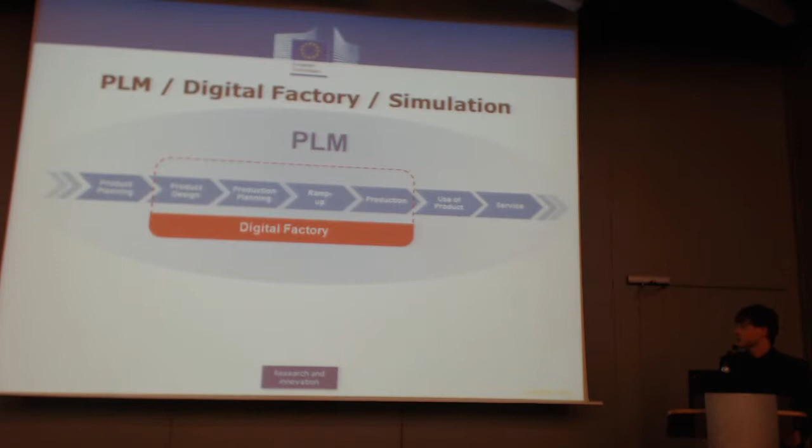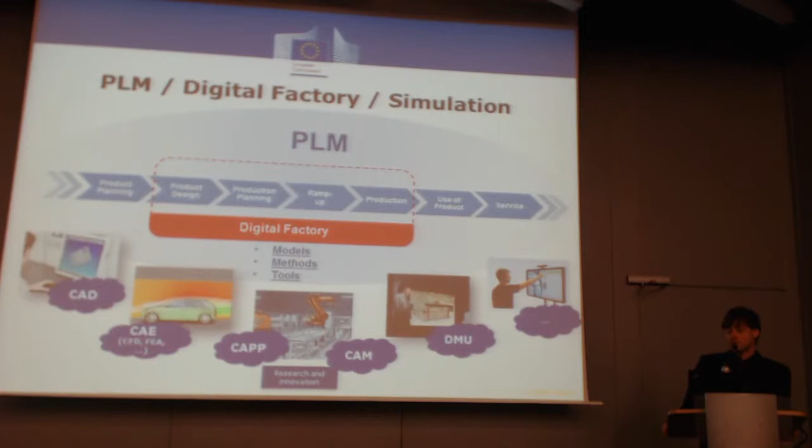If we narrow it down to the factory, then there's the concept of the digital factory, which I'd like to mention specifically because it's a very nice concept that consists of methods, tools, and models which help to plan, implement, and also optimize and run factories. This brings us down to the lowest level, where we see different tools: CAD tools, CAE tools, computer-aided process planning, and other tools.

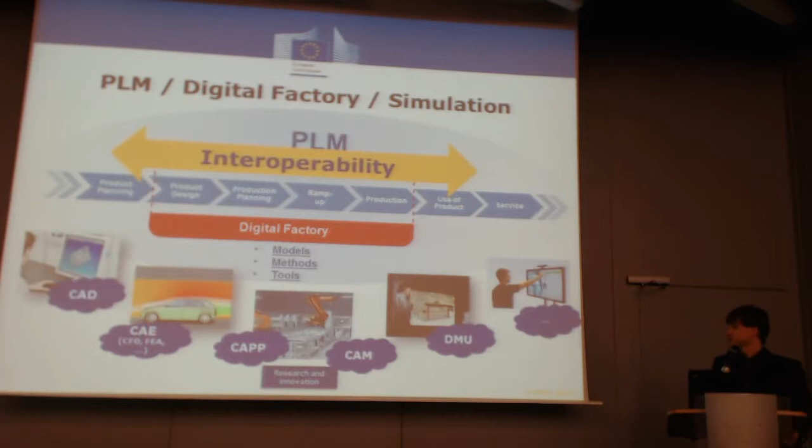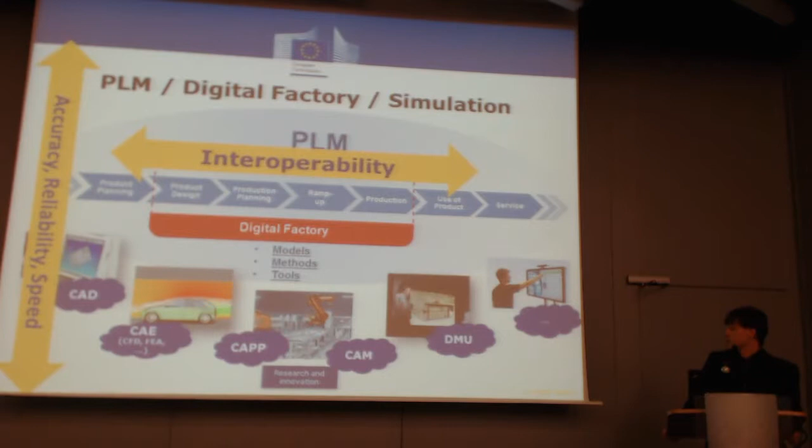Now we have the big picture of what our group is about. On the horizontal, it's about creating interoperability across the PLM, but also about improving simulation tools in terms of accuracy, reliability, speed, and maybe developing new tools and applications. The European Commission has recognized this need, and as Dr. Riemschneider said before, in the former FP7 roadmap there were 3 topics: one was the digital factory, the other two are smart factories and virtual factories. We will talk about this later, but we represent the group of digital factories, which comprises 8 projects.

The goals formalized by the Commission were European leadership - that sounds great - in knowledge-driven platforms, tools, and methodologies for product development and manufacturing. Second, accelerate product design and manufacturing planning, and improve accuracy, reliability, and speed of simulation. That's pretty much what we showed in the beginning.

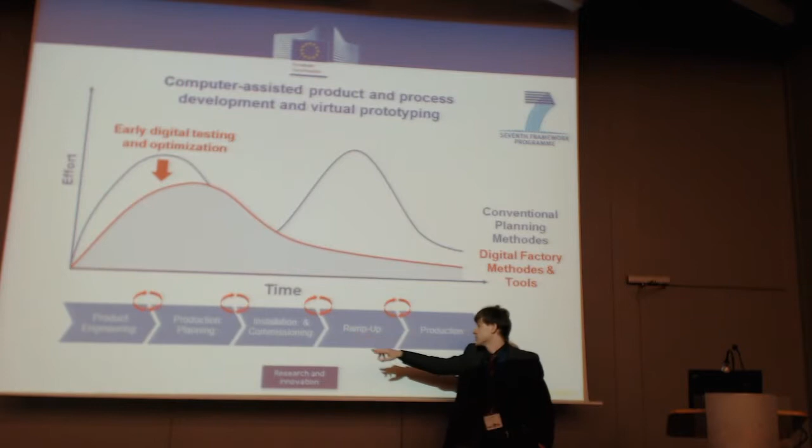This can also be illustrated by the effort it takes to bring a product into manufacturing. Basically we have two worlds: product engineering and manufacturing. These two worlds sometimes do not work so well together because manufacturing is more traditional - they like to implement processes, and once implemented, they don't want to change them. Product developers are much more innovative; they're used to inventing something new. The question is how to bring both worlds together.

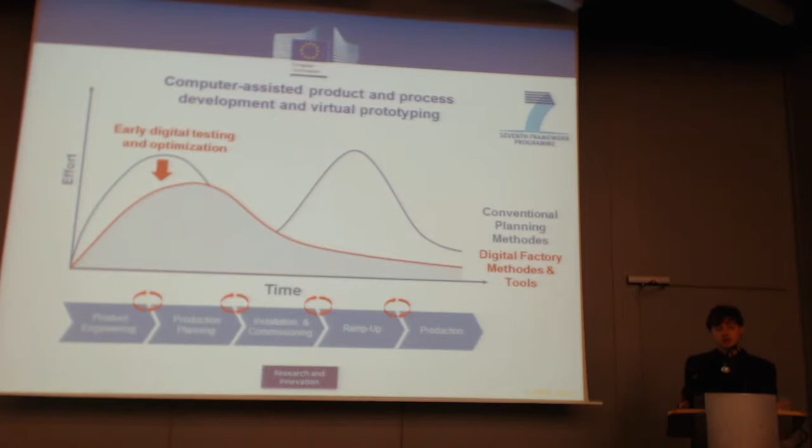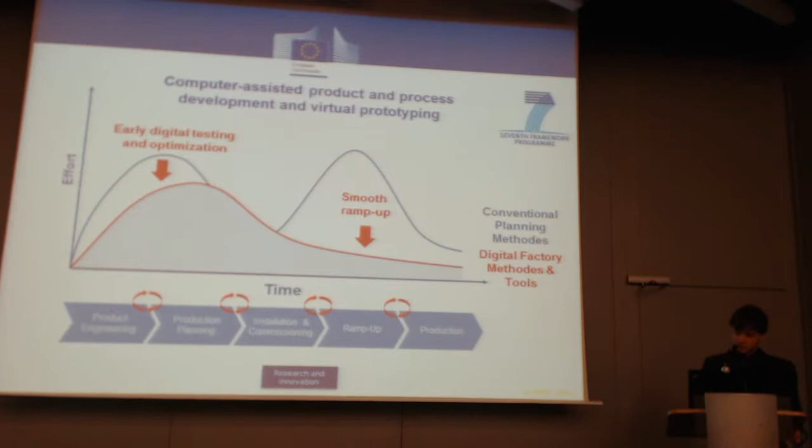This is a simultaneous engineering challenge, and one way to address it is by early testing and optimization already in the phases of product development, which allows for a smoother ramp-up during manufacturing. So our topic is about bringing two worlds together: manufacturing and product engineering.

That was the goal in the FP7 program, but we're moving forward to Horizon 2020, which I think is the biggest research program ever. The question is, what will change in between? The different megatrends and challenges - globalization, changing customer demands, rapid technological developments - are still ongoing. They didn't change, so should we change our goals? That is one of the questions.

We started to collect some key points. They basically come from the Commission, and they could be the goals for the future Horizon 2020 roadmap. It said: responding to higher variance, shorter innovation cycles of highly complex products like cars and airplanes. I tried to translate that - for me that's basically about mastering complexity and increasing transparency.

Then boosting the launch of innovative products through digital design and validation. We have to stimulate new innovations in terms of products, but also in terms of the tools used to design these products. We want to shorten the time to production, improve productivity, and reduce effort, time, and costs in production.

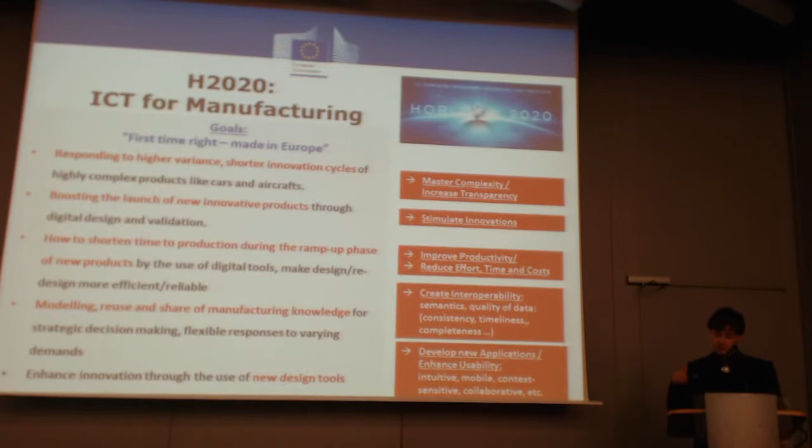And the final bullet point is about enhancing innovations through new design tools. We need to develop new applications, and existing applications need better usability, so we have to create intuitive tools. We have to bring the different applications onto the shop floor - we need mobile applications, context-sensitive applications, and collaborative applications.

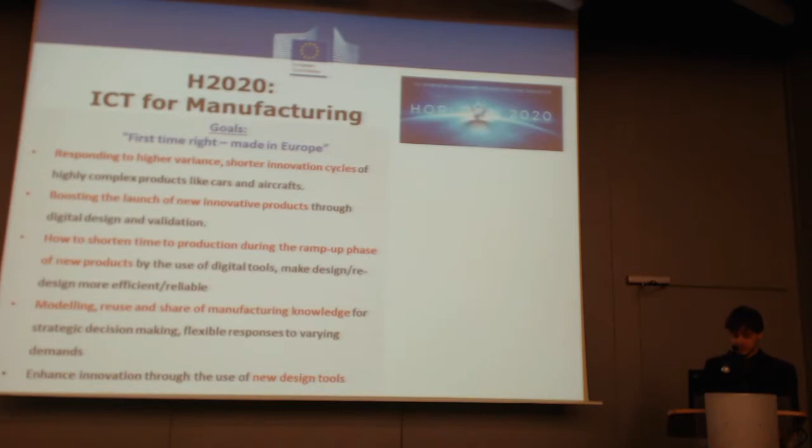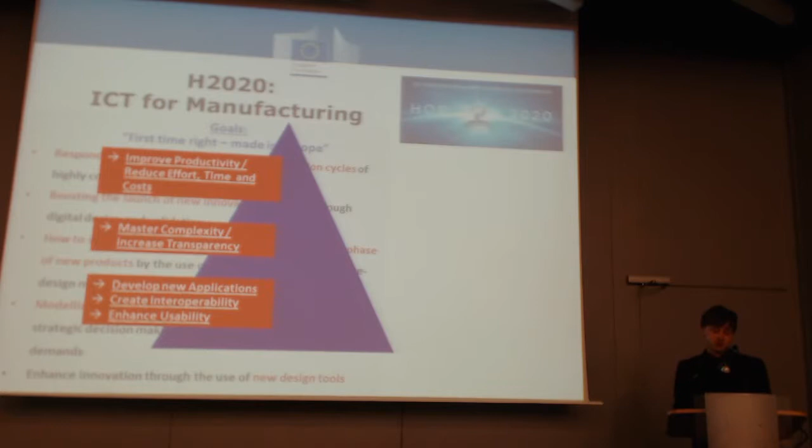So if we take these bullet points, I tried to locate them in a pyramid. I would say new applications and the interoperability and usability issues are the basic things we have to establish. Through better applications and interoperability, we can master complexity and increase transparency, and that will finally lead to improved productivity and reduced efforts and costs in production.

One example which nicely illustrates how Horizon 2020 in terms of the digital factory can be implemented is the Cloud4 project, which is currently under negotiations. The idea is very interesting because it's about bringing different ICT tools into the cloud and also establishing interoperability between these different ICT tools.

The good thing is the SME service provider can provide a bigger package - more solutions by joining up with other SME service providers, and they can offer their services by use, so we do not have to buy the product when we want to use it. By bringing these ICT tools into the cloud, we could also address new end users, new SMEs, which can take up the technology and use it to design their products and production processes.

So that is all for the thematic overview, and I will hand over to Nikos now for the overview about the group.

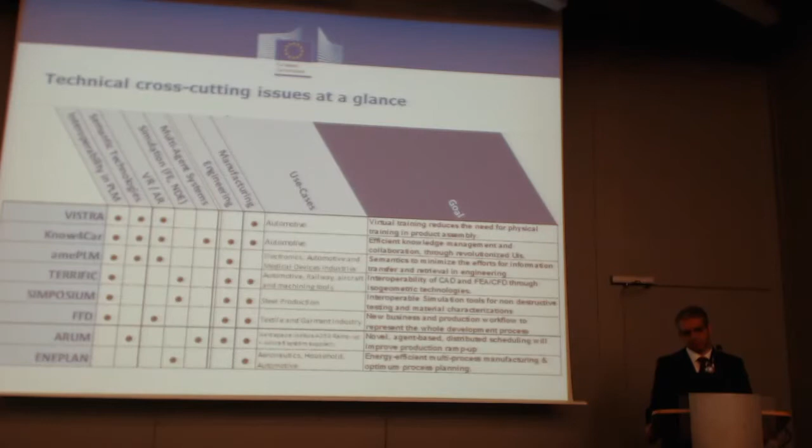And then we have the ENEPLAN project, which has use cases from three different industrial sectors, that is the aeronautics, the household, and the automotive industrial sectors. The major objective is to build a platform that will improve the energy efficiency of manufacturing processes.

So the first objective, the interoperability in PLM, the objective here is to achieve seamless data management in a number of different phases, starting from the product planning and product design phase, and ending with the use of product and the service of product phase.

The second major objective that this cluster of projects is dealing with is semantic technologies. The idea here is to introduce semantic technologies and to move from the standard way data is handled today, that is untyped information, with little chance to process this information with computers. This is what the standard web technologies are doing right now, and to move to semantic web technologies where information may be more extensible, can be relational, and of course can be processed by computers in a much easier manner.

Then we have the augmented reality and virtual reality technologies. In the past, we have achieved high immersion, but with high cost and low flexibility, especially with virtual reality technologies. On the other hand, desktop applications achieved low immersion on the one hand, but low cost on the other hand. The major objective here is to achieve, with augmented reality and virtual reality technologies, high immersion, low cost, and high flexibility.

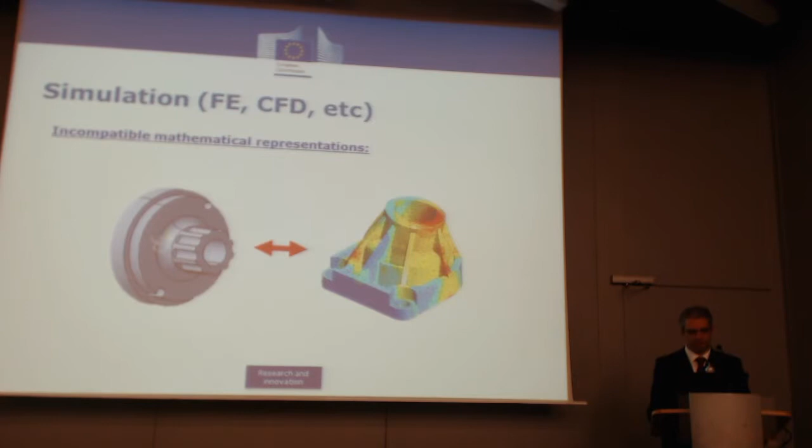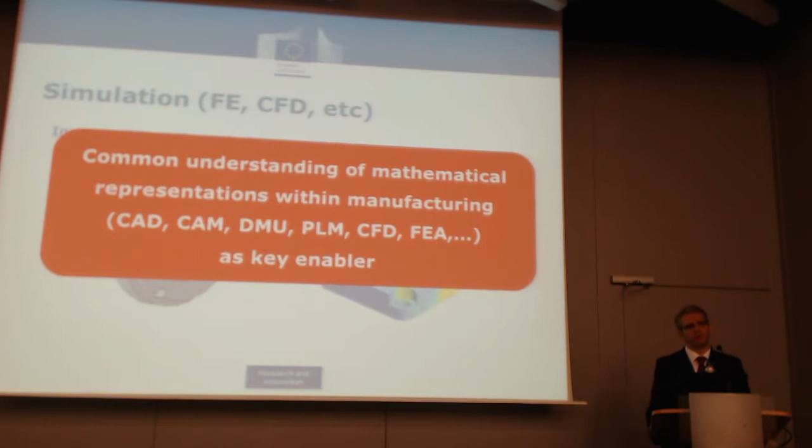Simulation, finite element analysis, computational fluid dynamics. The major issue here is to try to model incompatible mathematical representations in a way that today's computer-aided systems can understand. And this is a major issue because although we have achieved novel mathematical representations, these cannot be used at the time being by all the commercial systems.

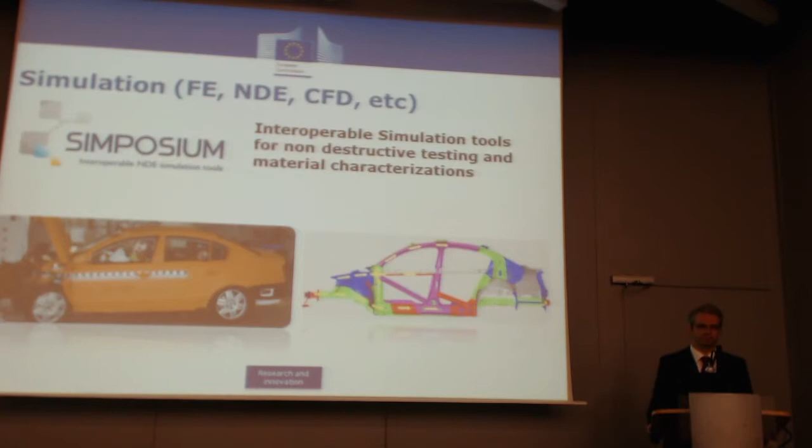Then another objective that we have in this field is to achieve interoperable simulation tools for non-destructive testing and material characterization. Finite element analysis tools, for instance, NDE tools, that is non-destructive evaluation, not near-death experience. Computational fluid dynamics, and so on, are some of the tools that we're going to use and develop in this field.

It's not about guiding the consumer when he or she wants to buy a new car. It's not about learning how to drive. It's rather about building a knowledge-based platform that is able of capturing, organizing, and reusing information related to manufacturing processes. The major objective here is to build a web-enabled IT platform that will be capable of making it easier for different stakeholders, for instance OEMs, system integrators, material suppliers, equipment suppliers, to work together to exchange knowledge.

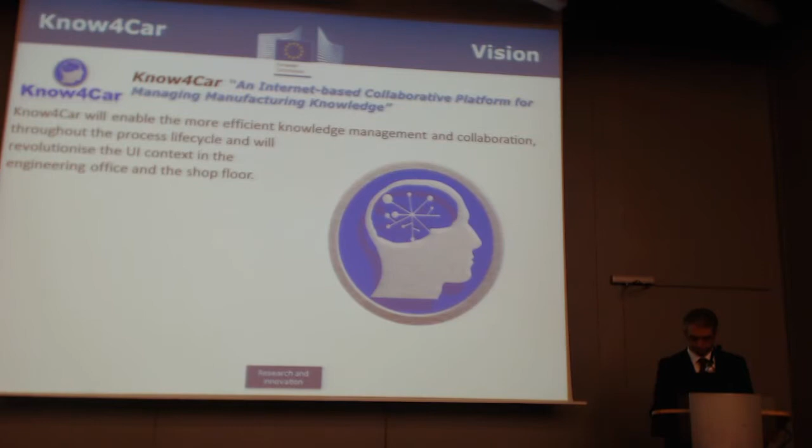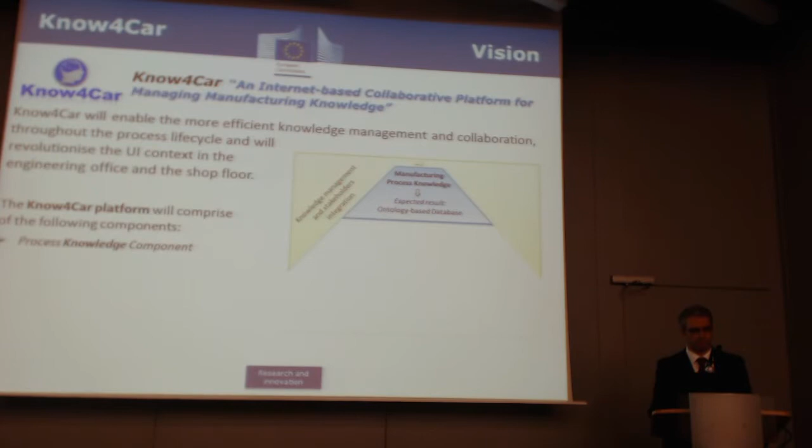The Know4Car platform consists of 4 different components. The first component is about process knowledge management. This is about building a data model and the associated ontology for dealing with all information related to manufacturing processes. The second component is an integrated collaborative platform, which is the backbone of this platform.

This is where all components will be linked together and integrated, and this is the main component that will give different companies and organizations the chance to work together. We have the extended engineering component, where the major issue is to allow different organizations to exchange information in a secure way. And of course we have the advanced user interfaces and training component, which is about introducing modern augmented reality technologies to the software so that operators may be trained in an easier and faster way.

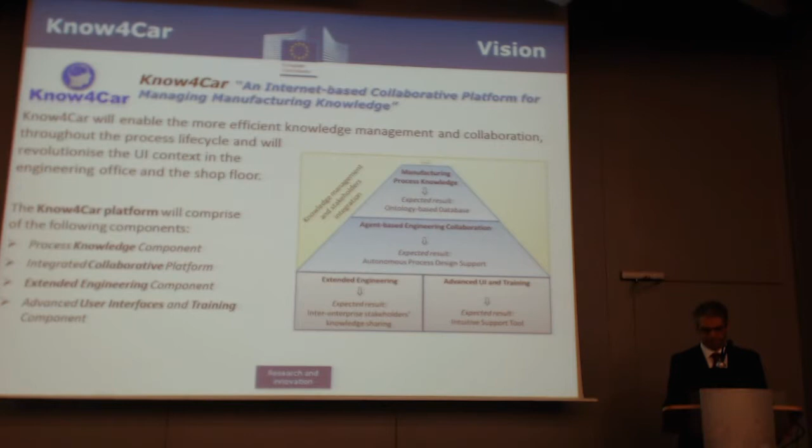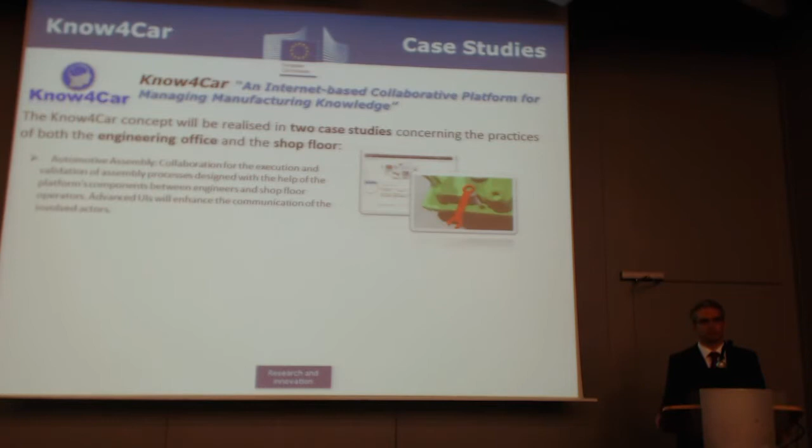We have 2 major case studies in this project. The first is about automotive assembly, and the major objective of this use case is to validate human-based assembly processes and use augmented reality techniques for training the operators in the software.

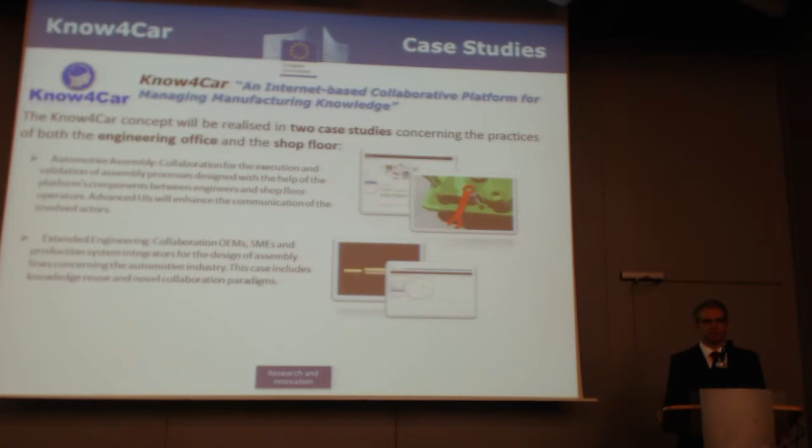And the second one is the extended engineering collaboration, where OEMs, SMEs, system integrators, material and equipment suppliers can work together exchanging information, thus making the whole process faster and more cost efficient.

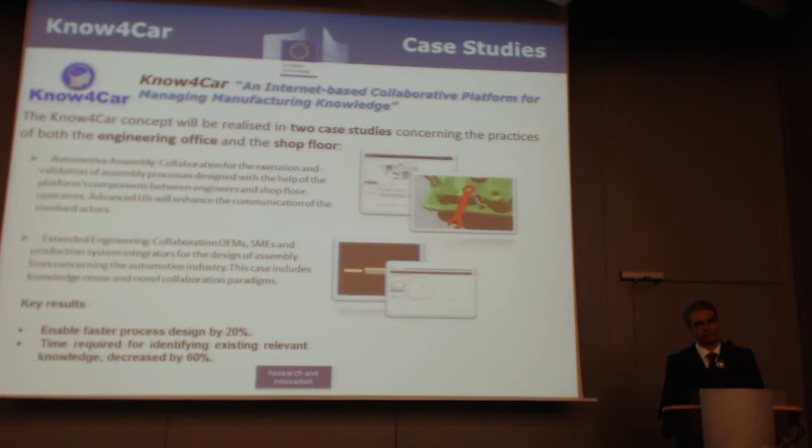The major results that we expect from this project is to enable faster process design by 20%, and to reduce the time required for identifying existing relevant knowledge, organizing it, and using it by 60%.

The second project that we present in this cluster is the ENEPLAN project. The major objective of this project is to develop a network-based and web-enabled Meta-CAM tool in order to improve the energy efficiency for specific manufacturing processes.

The first objective we have in this project is to reduce the environmental footprint for specific manufacturing processes, especially for metal formed components, by selecting a more energy efficient combination of processes among those available in the supply chain. For instance, if two different suppliers are able to carry out a specific bending process, then from the energy efficiency and cost perspective, one of these partners can do this job in a better way.

Another objective is to improve the energy efficiency on the process level. The idea here is to optimize the process configuration and process parameters from the energy and cost perspectives.

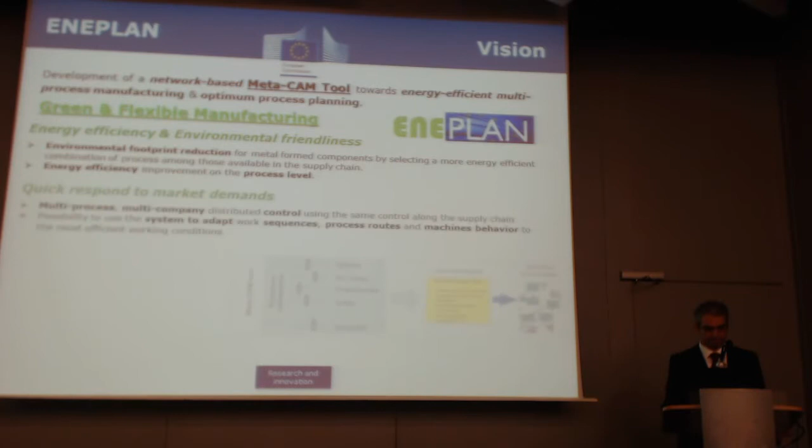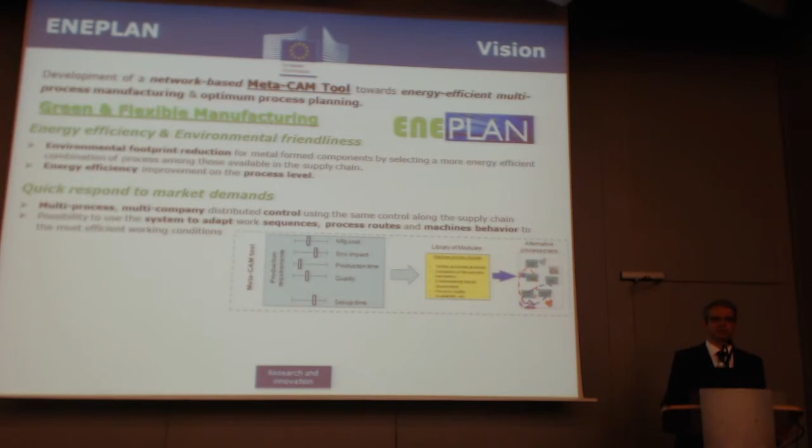On the other hand, the ENEPLAN platform will also take advantage of information related to the weather, in order, for instance, to check when energy from renewable resources is available. This platform will also take into account information from the market, such as demand from different partners and different orders, and at the same time information coming from the shop floor of the partners belonging to the supply chain.

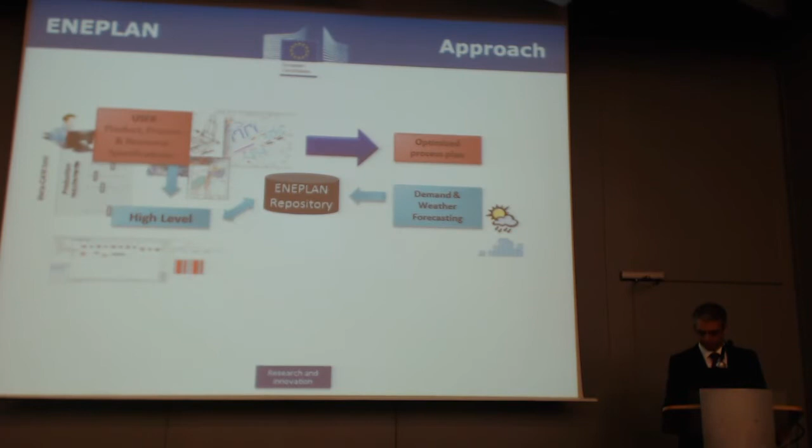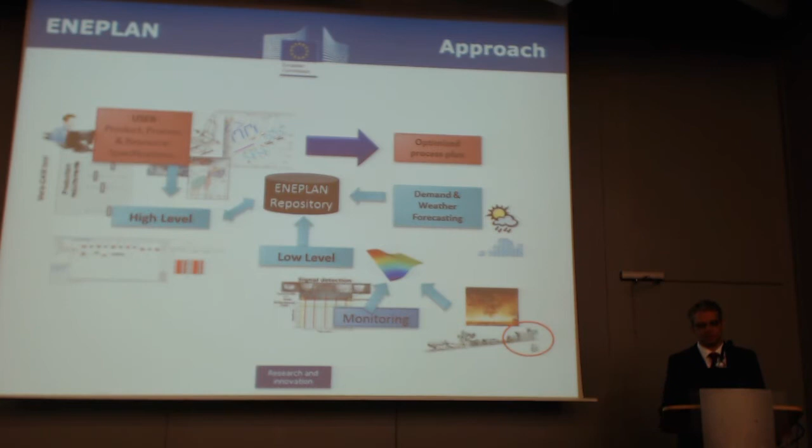In one picture, the end user will introduce the product, process, and resource specifications in the platform at a high level. Then the ENEPLAN repository, consisting of a list of libraries and a series of advanced algorithms, will take these high-level specifications and transform them into low-level specifications, taking into account the demand profile, weather forecast information, and the status of the shop floor of the partners belonging to the same supply chain. In the end, the output will be an optimized process plan.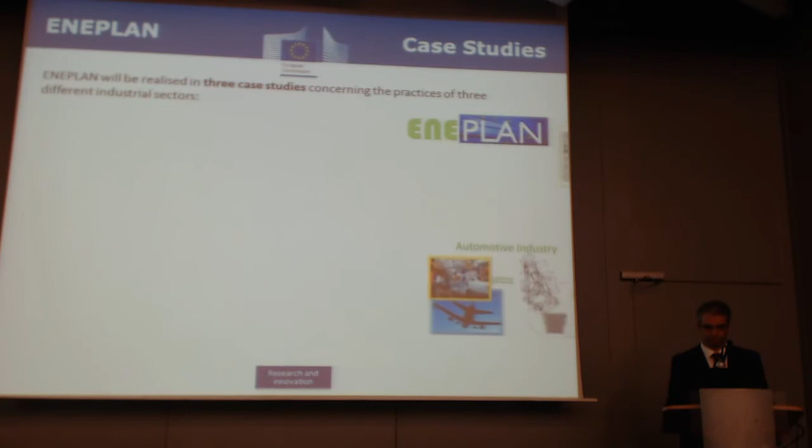Three different case studies will be realized in this project from three distinct industrial sectors. The first case comes from the household industry, introducing the problem of producing 6 versions of front panels for refrigerator doors. The idea is to compare different manufacturing processes, for instance punching or laser machining, from the energy and cost perspective.

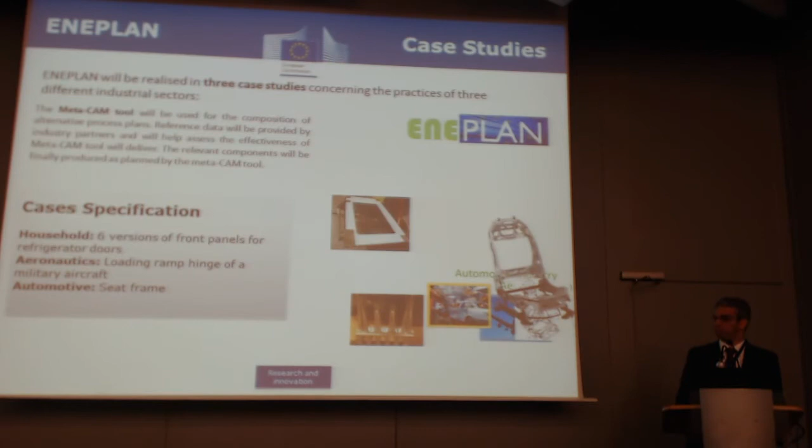The last case is related to the automotive industry, a seat frame. There we will compare different welding technologies, for instance spot welding, arc welding, and laser welding, from the energy and cost perspective. So that's all from my part. The next project is the amePLM.

Right now we're in the process with our industrial partners to refine the ontologies. As you may know, forming an ontology is a very iterative process, so you have to go back and refine it if it doesn't fit correctly. And right now, we're in this stage.

Our goal is to develop an open engineering platform based on existing tools and libraries. We want to research and develop tools to assist in product and process development, and devise a visualization module to enable cross-disciplinary collaboration, and therefore also remote consultation approaches.

Here's a little picture of our architecture. In the middle you see the amePLM engineering platform, and right around it you see the ontologies as a base element of the architecture.

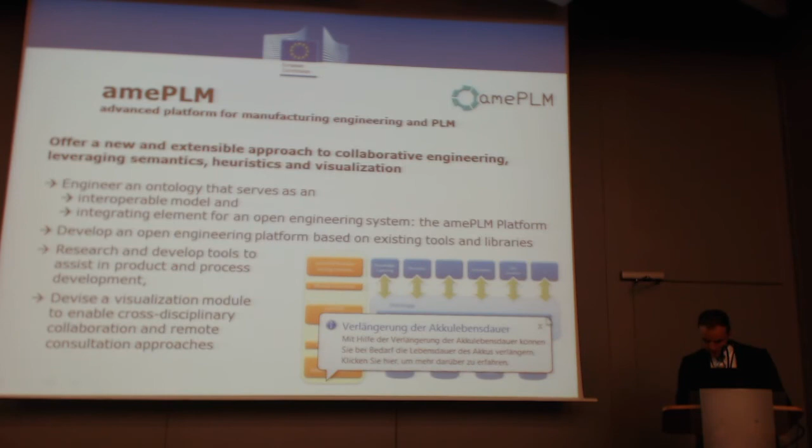And we're right now in the middle of our...